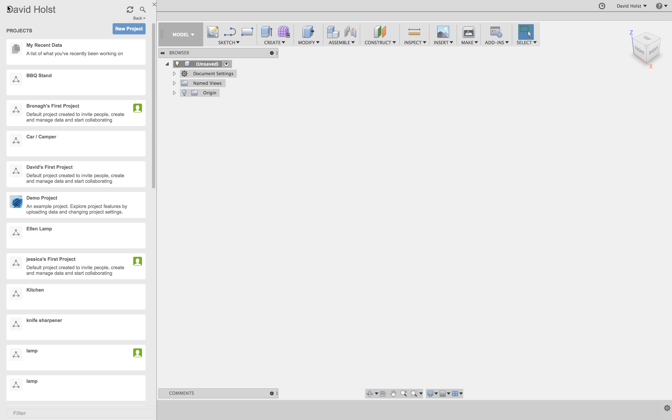First thing we're going to do is create a new project, and you might end up with a couple of tries at this lamp, and you'll definitely do this tutorial once, and that's okay. We're going to click up on the waffle in the top left hand corner, and then click new project. I'm going to call this one Yr10 lamp.

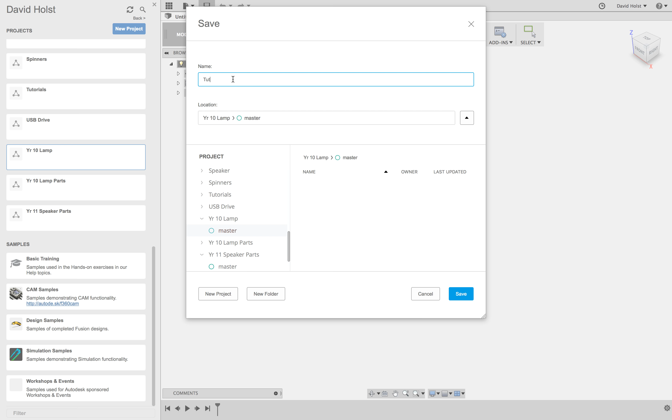Once I've created my project, that spinning wheel just means it's saving. I'm then going to click save. Up here, location - I'm going to make sure I click this bottom arrow, make sure I call it Yr10 lamp. I'm going to call this one Tute, and I'm going to save it.

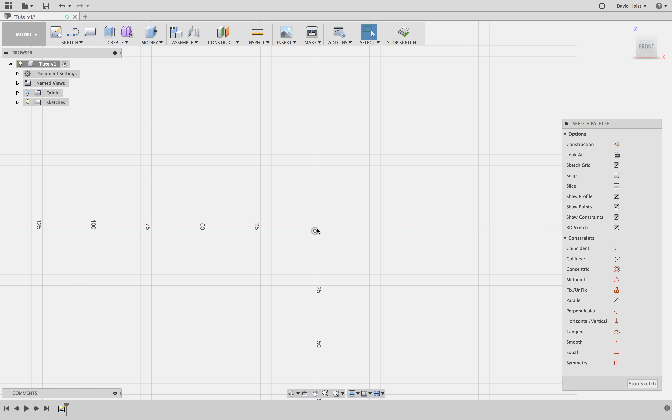The first thing I'm going to do is create a sketch, and I'm going to jump on the front. I'm going to make my profile to revolve. I'm going to hide my projects panel and make a profile that I can actually revolve around. So I'm going to hit L for line and click on the middle.

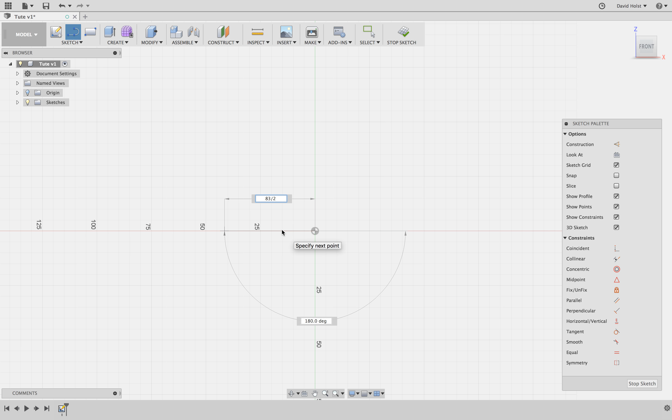This needs to marry up with the bottom piece that I'm giving you, which is going to be 83 millimeters. So I need to write 83 over 2, and that'll give us 41.5 on the radius.

Going to hit L again, I'm going to go up, and I'm going to say go 60 millimeters high for this section.

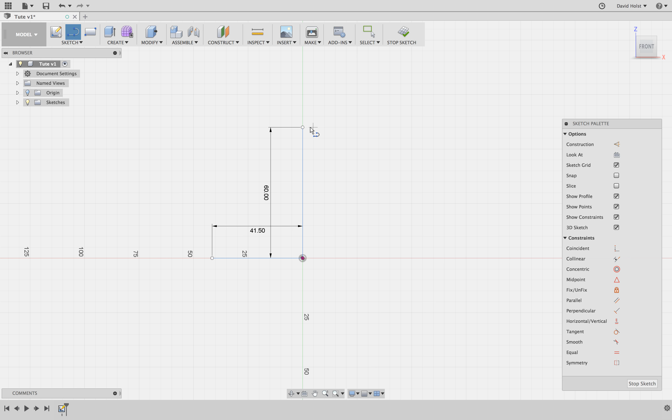Then I'm going to go L again, come across here to maybe, I don't know, 35. And then I might put some sort of bend in here. So I might hit S, put an arc in. I'm going to do a 3-point arc. I'm going to click this point, this point, and I might bend it out a little bit, like so.

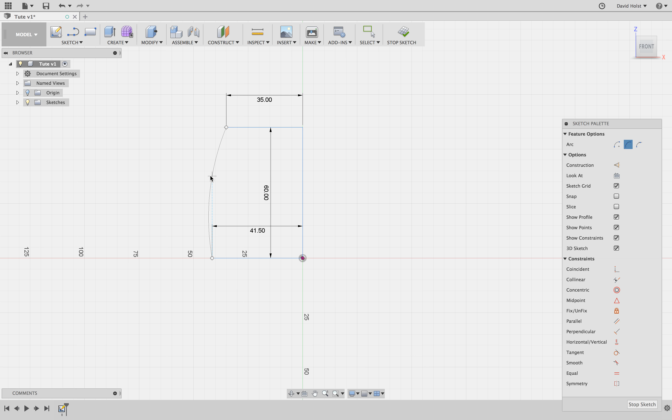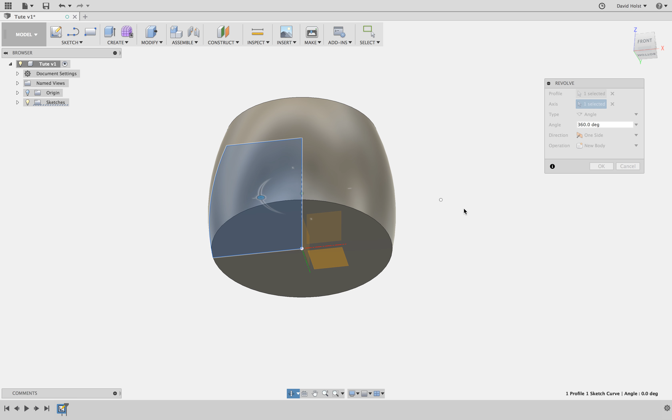Now what I need to do is revolve this shape to make it 3D. So I'm going to hit S to open up my sketch toolbox, type in revolve, click the shape first, come over to axis, click the middle axis, and that actually turns it into a full-blown shape for me, which is good. So I'm going to hit OK on that one, and I'm starting to get something that resembles the shell that I'm after.

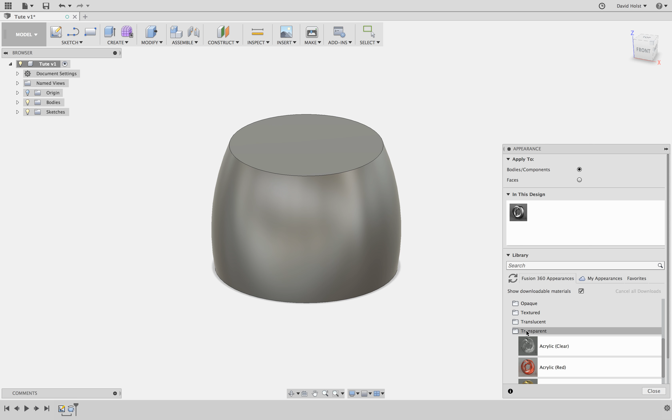Okay, so now that I've got that shell, I need to hollow it out. This is actually going to be my clear piece. So the first thing I'm going to do is hit A, and down here I'm going to go plastic, transparent. I'm going to make this polycarbonate clear, so that now becomes a clear piece and looks like it on the model.

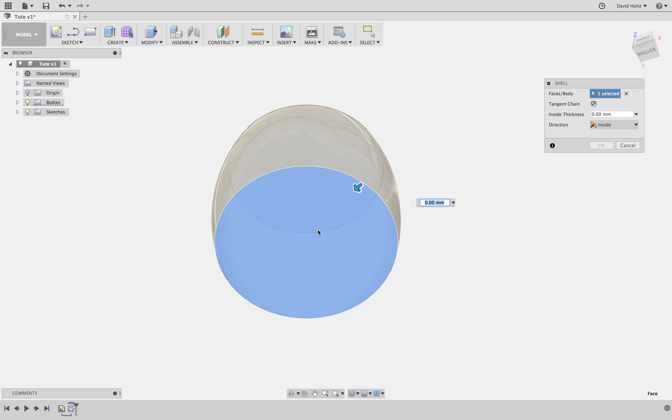The first thing I'm going to do is shell it out or hollow it out. So holding Shift and using my middle mouse button or two fingers, I'm going to move around until I'm looking at the bottom - you can see up here that says bottom, so I'm looking at the bottom. I'm going to type S, then type shell, and click at this bottom piece, giving that a wall thickness of 2 millimeters. Hit enter, and now it's hollowed that out for me.

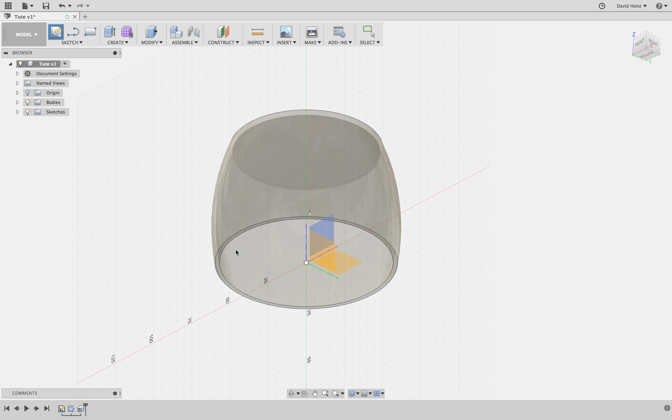But I need a way to actually join this to the base. So I'm going to go sketch on here, click on this bottom part - I know I'm drawing on the bottom because it tells me I am here. I'm going to hit C for circle, jump on the middle, and I'm going to make a hole that's 63 millimeters.

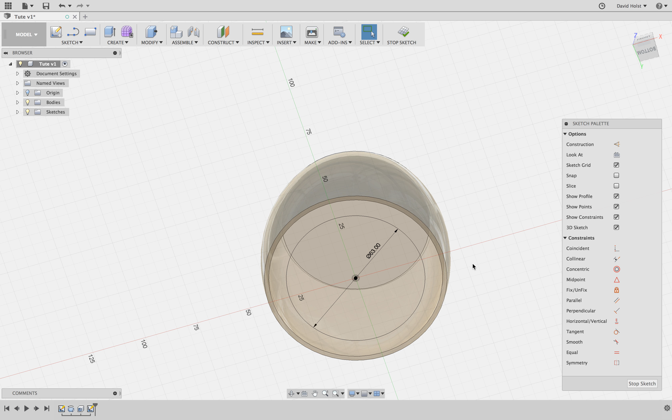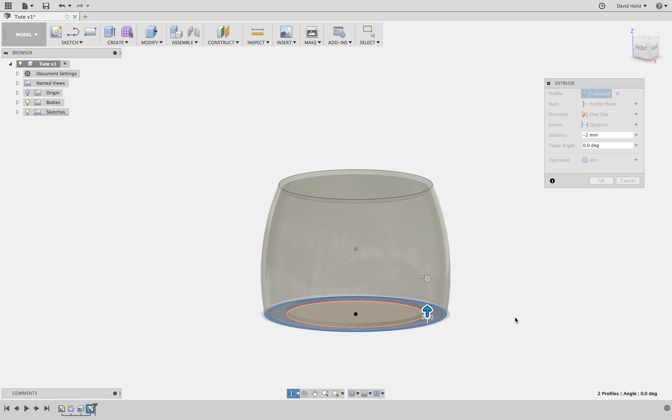And I'm going to extrude this up 2 millimeters probably. So I'm going to hit E for extrude, select that ring and the outside ring, and push that up about negative 2, I reckon. With the operation here, I need it to join. Yeah, I think that's going to be alright, and I'm going to hit OK. So that's actually created that lip.

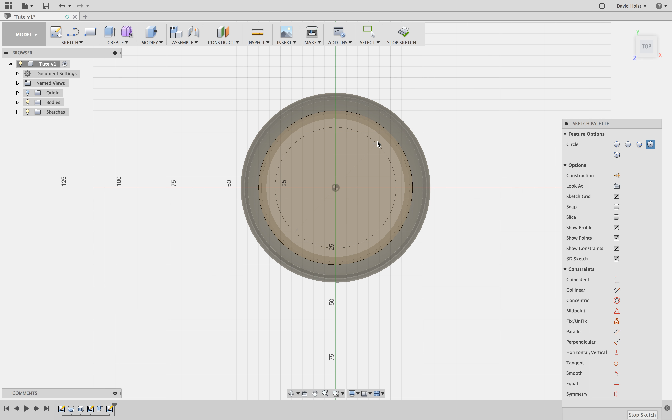For me to join it on, I'm actually going to glue a piece to here. So rather than have it solid, I'm actually going to remove some of that material. I'm going to go new sketch, jump on the top, hit C for circle, jump on this middle piece. I'm actually going to cut out a hole - let's call it 55 millimeters. Enter. Then I'm going to hit extrude E, grab that guy, push it down and actually cut it out, like that. So that's my clear middle piece that I've got.

Now I'm going to put some sort of design on this. There's lots of different ways to put designs on. You might find there's actually some designs that you can't put on your particular model due to how well you understand the software and if the software will even allow you to do it. So I'm just going to show you how to do a basic pattern and then move it around using the circular pattern. So I'm going to hit create sketch.

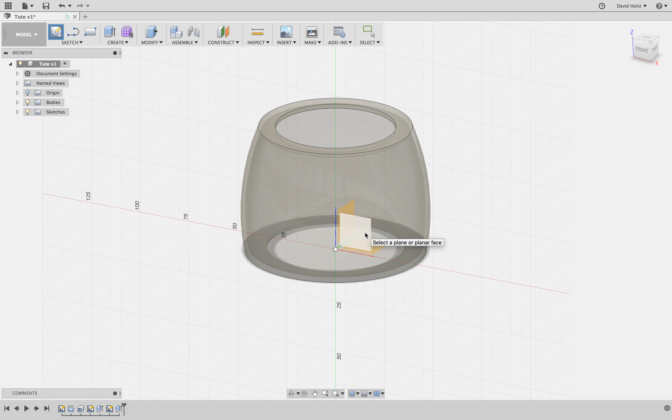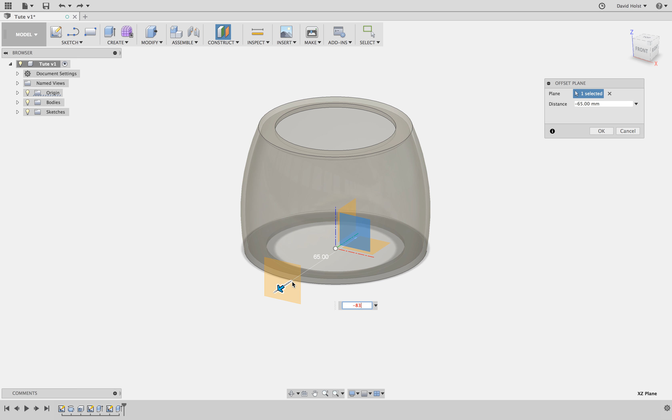I'm going to select this front plane here. I know that's the front because I'm up here looking at front. Actually, no, undo that. I'm going to create an offset plane instead, so I'll go up to Construct. I'll make sure my origins are turned on, click on this guy here, drag him out, and I want that to be negative 83 over 2. That gives me another work plane to draw on.

Now I can go and hit sketch. Click on that work plane, and now I'll be drawing on the outside here. I need to put some sort of basic pattern in, so I might just put a slot pattern in, for example.

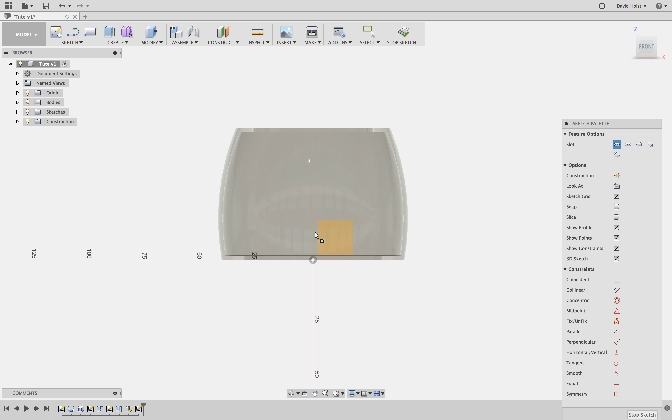I'm going to do a center to center slot, lining up on this middle line here, off the origin down at the bottom. Push up a little bit, click there. Push up to here, click there. Then maybe make it like 3.5 millimeters across. Enter, enter. I'm actually going to use my dimension tools to space that out properly.

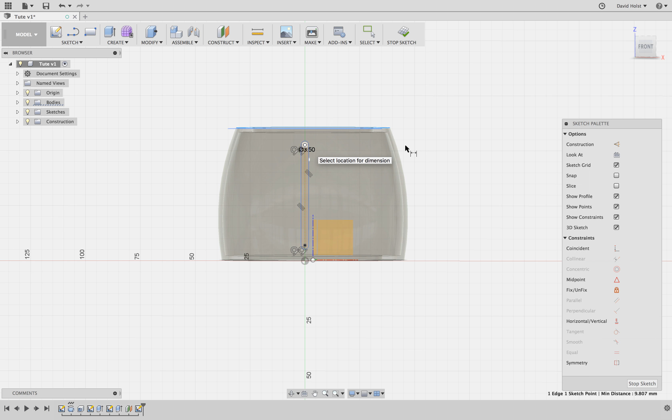So I'm going to hit D for dimension, click on this top line, middle dot, push it out, and I'm going to make that 5 mil. Once again, dimension tool, D for dimension, middle dot, bottom line, push it out the side, and I'll make that one 5 mil as well.

Okay, and I'm going to stop sketch. You can see that I've actually put that slot on there, but it's not actually in the surface. It's on the outside, but if I click on the right hand side here, it's actually in the middle of the surface there. It's not quite far away enough. That's not a problem because we've done it in Fusion—we can make an adjustment there.

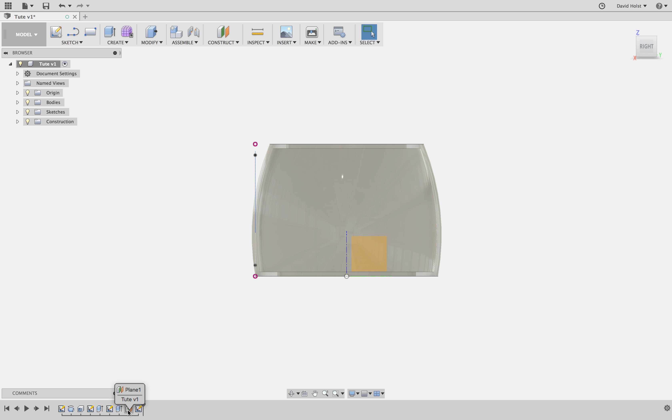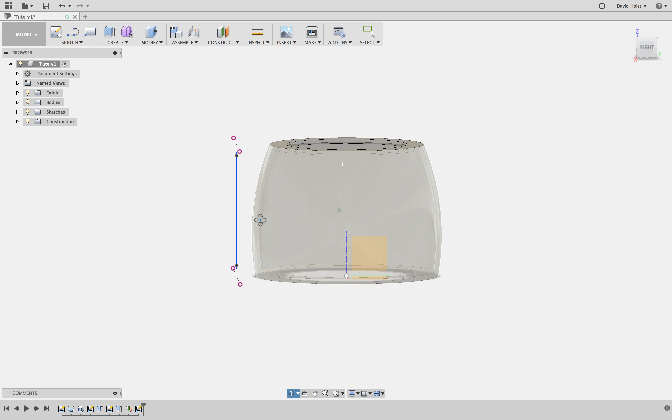So we're going to come down to our timeline at the bottom here, and I'm going to double click on this plane. Now this plane that we ended up putting in at 41.5, I'm going to delete this distance out and make that 50—sorry, negative 50. Hit OK, and see what that's done now? Let's actually move that sketch on the outside, which is a good thing for us.

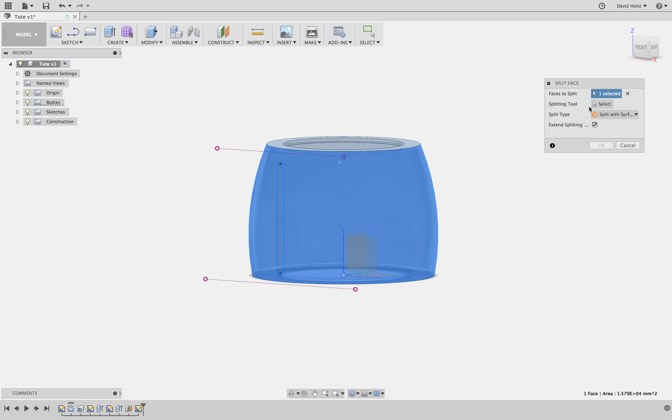Now I need to actually cut this slot into this object behind it. So to do that, we're going to click up on Modify and do a split face. The first thing I need is the faces to split, so I'm going to click on this outside face of my clear piece. Then for my splitting tool, I'm going to select that slot that I've drawn, like so. Then I'm going to hit OK.

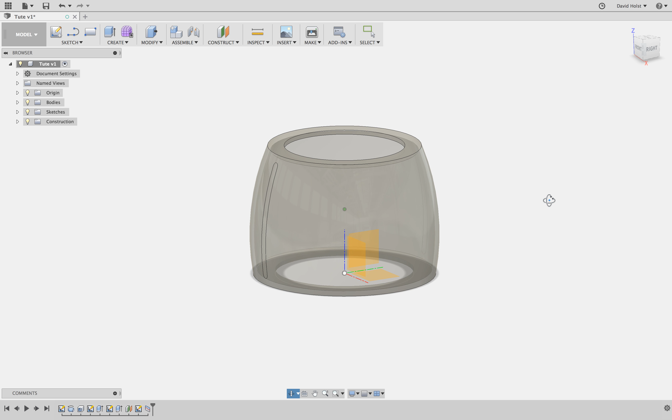That's actually gone the whole way through, which is fine—so I've got it on both sides. Which will now allow me—I'm going to hit Q to do a push-pull. I'm going to click on this slot, and I'm going to go in -1. I've actually put that slot in, -1.

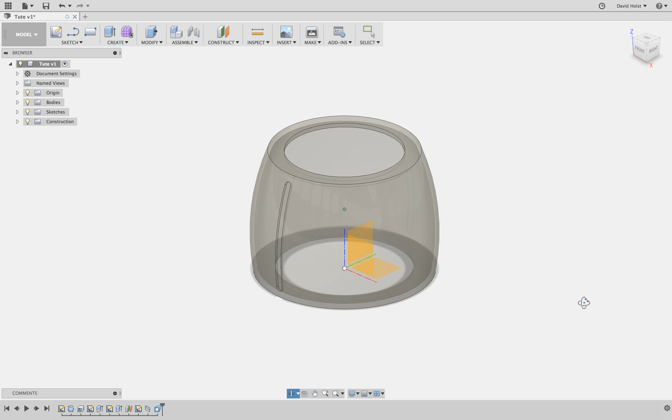Now what I want to do is make that slot go the whole way around my shape. So I'm going to hit S and type in circular pattern. What I'm going to do is select this offset face down here on my timeline. My axis is what I want it to revolve around, so I can pick pretty much any one of these circles. Then decide how many I want of them.

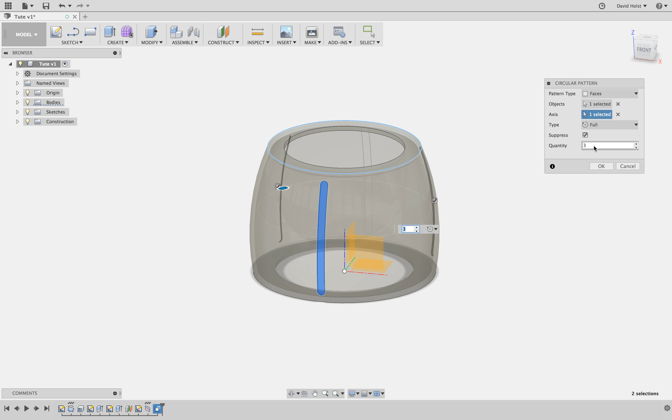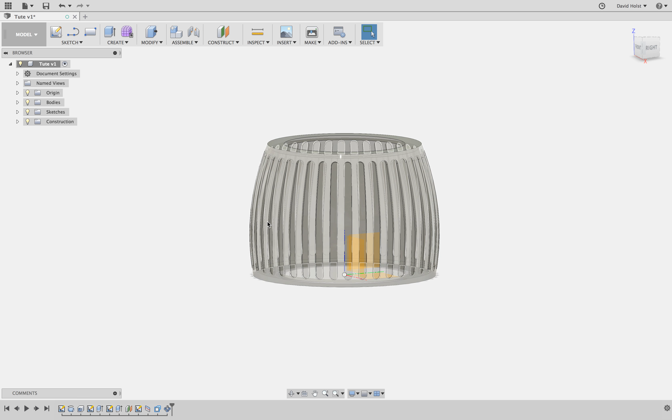So I'm going to say 3 here. I'm going to go maybe 20, see what that looks like... 30... 35... 40—I think 40 looks pretty cool. So I'm going to hit enter and the computer's going to calculate that. Now what I've done is created that pattern the whole way around on my lamp. I've only gone in a millimeter because I don't want to go the whole way through my particular build. Okay, so that's my middle piece.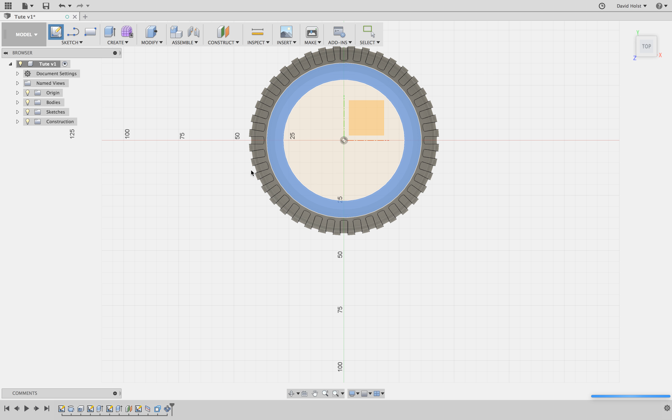Now if I want to put a top piece on it in a different colour, there are a couple of ways I can do that. I'm just going to put a tapered piece on for now. So I'm going to go to create sketch, click on this top face here, hit circle off the middle, and extend it out to this line here at 70 millimeters. Then I'm going to do a stop sketch.

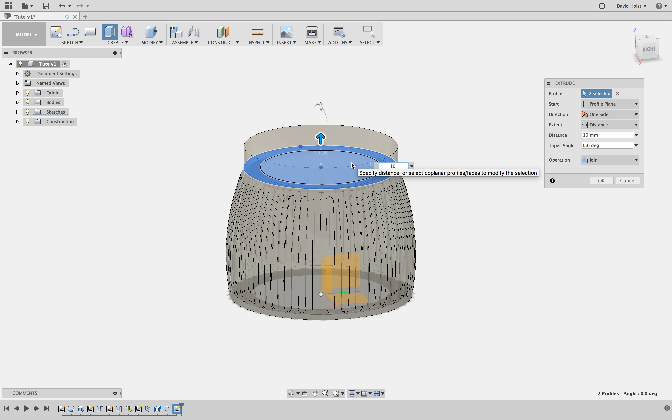Now what I can do is hit E. I can grab that outside circle and the inside circle, and I'm going to go up maybe 15 millimeters—maybe 10. But it looks a bit funny going up flat like that, so instead I'm going to play with my taper angle here and change that. I can also drag on it up here as well. I think maybe negative 25 looks like it's fitting in, but it might still be too big—I might jump back to 8 millimeters.

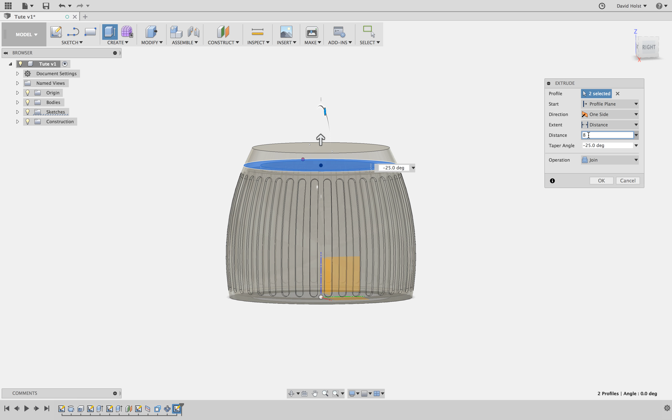Yeah, I think that looks pretty good. Instead of join though, I'm going to do this as a separate part. So I'm going to go operation, new body. And that's going to make it a separate part that I can print separately and make a separate part color.

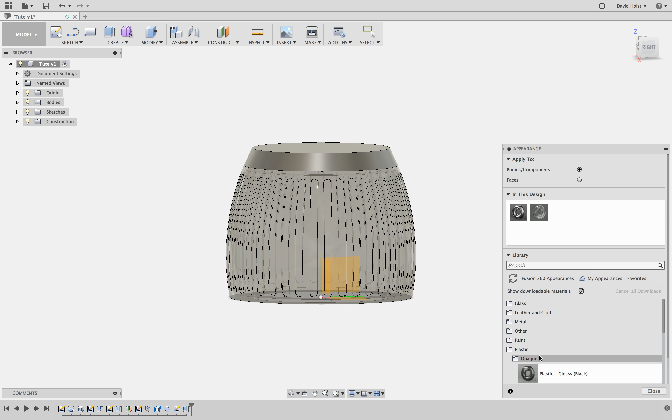Hit OK. I'm going to hit A to bring my appearance library up. And instead of translucent, I'm going to go plastic opaque, and I'm going to make that one green. Plastic glossy green. I'm going to click and drag, drop that one onto the top, like so. So now I'm starting to get an idea of what my lamp's going to look like.

I can turn off my origin, have a bit of a look. Now I'm thinking I might put a ridge in this top section here.

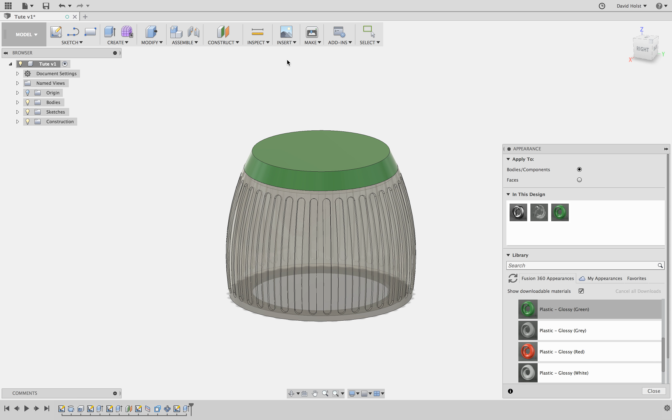So I'm going to do a similar thing to what I did the first time around. I'm going to go construct an offset plane, turn my origins back on, jump on any one of these planes, doesn't really matter. Come out 50 mil, create a sketch by clicking on that plane.

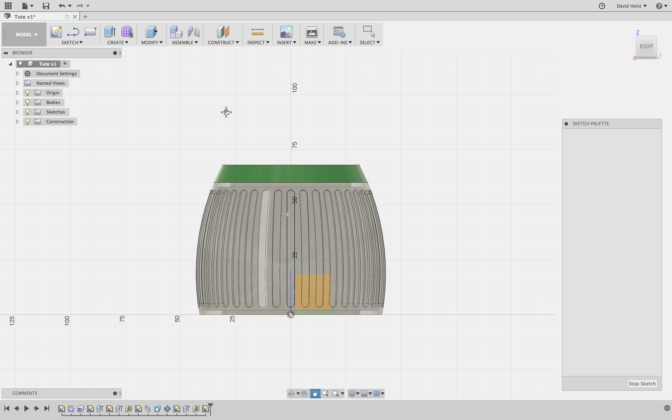This time I'm going to draw a rectangle. So I'm going to hit S, type in rectangle. I'm going to do a center rectangle.

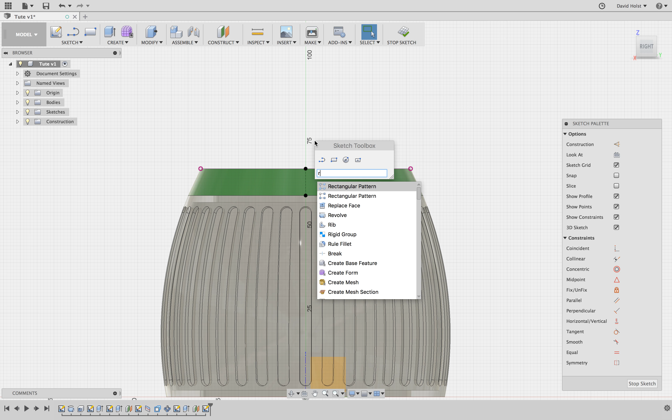What I might do actually is I might create some construction lines. I'm going to hit L first, and I'm going to do a line snap to the middle there, down at here. Now to turn that into a construction line, I'm going to click on it. I'm going to hit X, and it goes dotted like that. So that's the middle. Now what I can do is I can type S, rectangle, center rectangle, snap to the middle, so I know that when that triangle comes up, I've snapped to the middle.

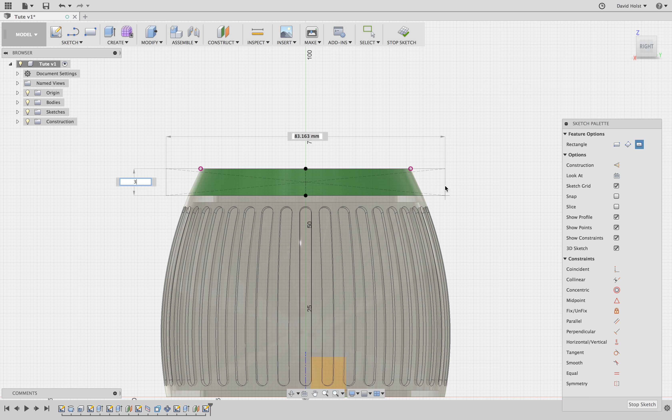Whoop, not quite there. Rectangle. So I'm going to type 80 for the height of it. I'm going to go maybe 3 mil again, maybe 2 mil. Tab, and then just 80 on that's fine. It doesn't matter if it's too big. I'm going to hit enter.

Once again, I'm going to cut that face with this cutting tool. So I'm going to go modify, split face, click on that face, splitting tool, click on the rectangle. Okay, that's going to cut that through. And then I can hit Q again for press pull, grab that guy there. And then I'm going to go in neg 1 again to put that ridge in, like so. Just make it look a little bit more interesting.

I'm going to round that top corner off. I'm going to hit F for fillet, the top corner, and I'm going to round that by 2, I think. Okay. Cool, now I get something that's starting to line up.

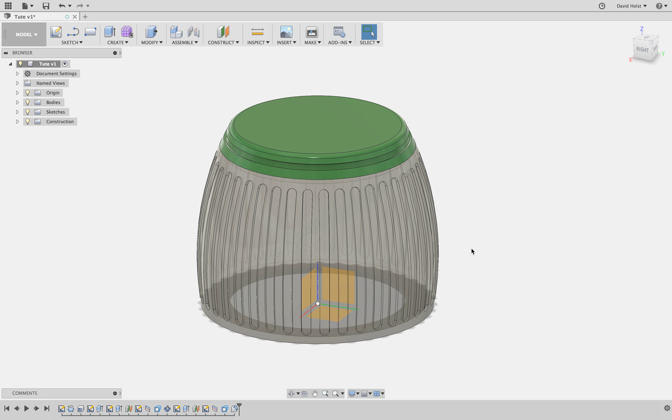Okay, so to get an idea of what this is going to look like, I'm now going to bring the base into it to get an idea of what its proportions looking like. So what I'll do is in class I will share this with you. You will have access to a folder called Year 10 lamp parts. And when you go in there, you'll see a base that I've already drawn up, and I'll share this with you.

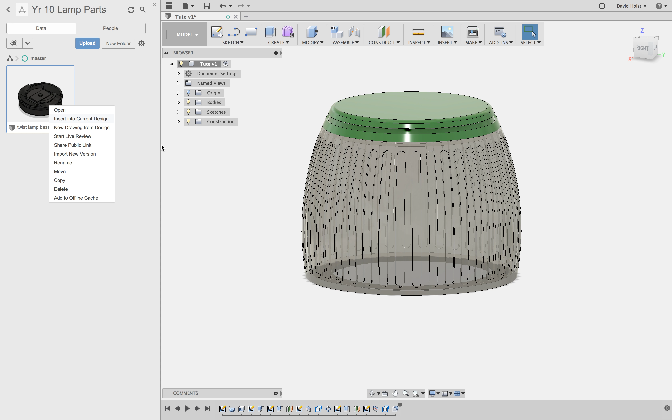Once I've done that, you can go to the lamp base, you can right click on it, and you can go insert into current design. That's fine. And now it's put the base in for me.

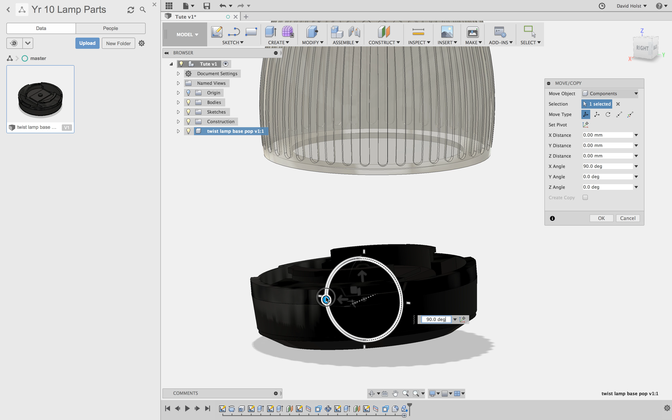Now I'm just going to use this arrow. I'm going to drag it down. And I'll use this one and actually change the angle around to 90 degrees. Hit enter.

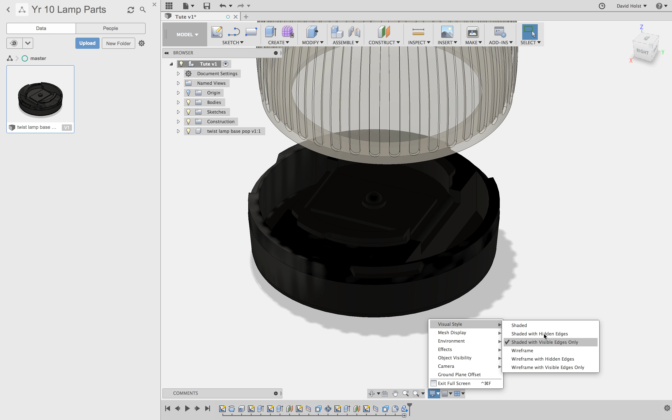Okay, so it's a little bit hard to see that base. So I might change my view mode. So I can go into display down here, a picture of the computer screen. I'm going to go visual style. I'm going to go shaded with hidden edges. No, that doesn't really help. Maybe I'll go wireframe like that. There we go. You can kind of see what's happening a little bit easier now.

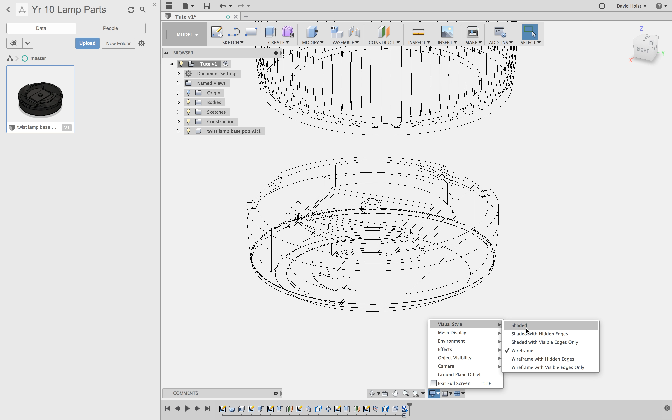Okay, so now what I should be able to do is I'll just jump back. So I'm happy with how that's imported. I'm going to go shading with hidden edges. I'm going to join these two parts together. So I can do an assemble, I can do a joint.

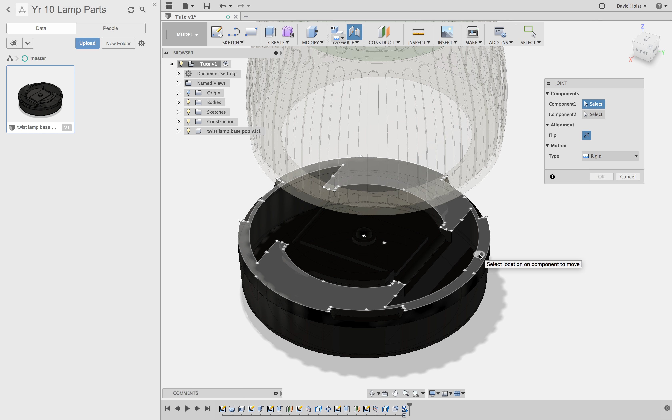I'm going to select this top face, hold down Command. I'm going to select the middle. I'm then going to look up underneath, hover over this bottom face, hold Command, select the middle, hit OK. And that's now snapped that base in place. And now I've created a lamp.

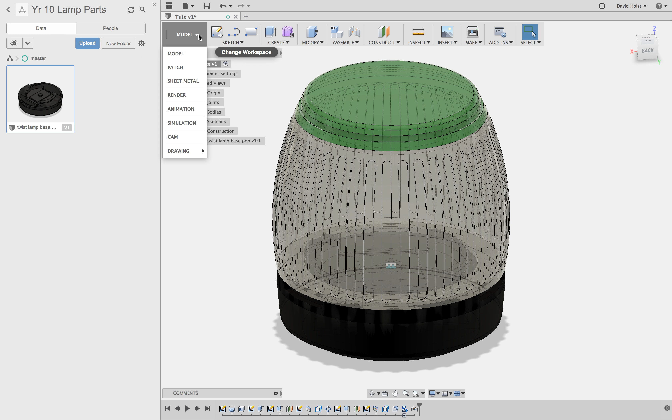Once you get to this stage, if you want to see how it's looking, you can click up on Model, Render. I'm going to turn Joints off to get rid of that icon. And we should actually be able to hit play and do an in-canvas render and see what it's actually starting to look like.

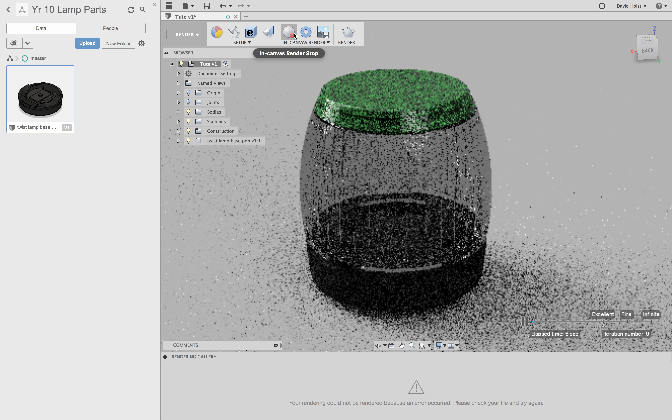And the time that this takes will just depend on how fast your computer is. Being a transparent material, it usually takes a little bit longer. It won't look exactly the same as how we're going to print it, but it will give you a pretty good idea. That brings us to the end. Thank you.